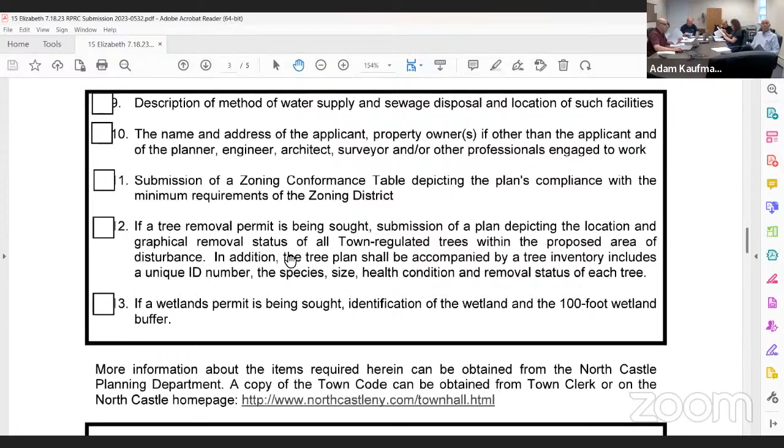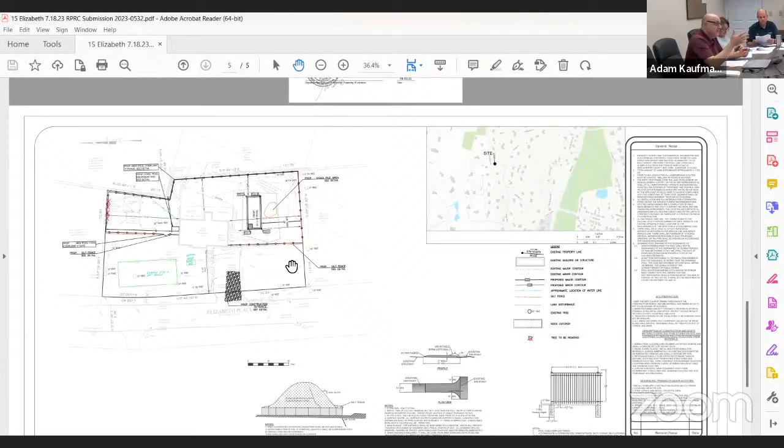Relatively simple project here. The only thing I have for you, John, this is a pool on the side of the house. Going out there, it looked like there was a lot of fill potentially that was brought onto the site. Did you see that? No. Okay, so maybe check that out, just see what's going on.

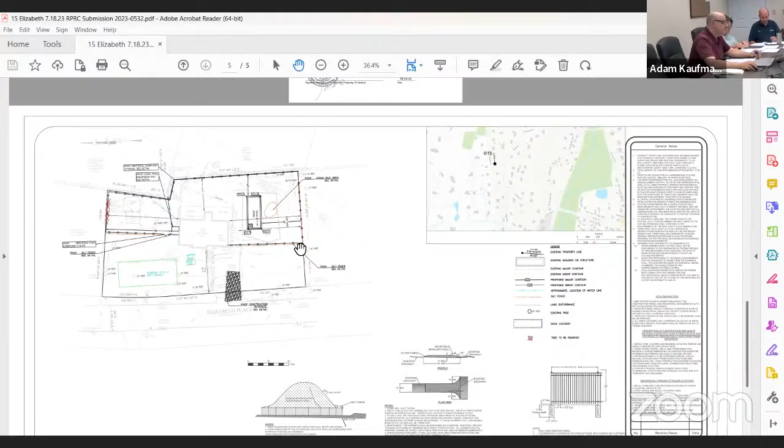I had a note that they should include a zoning conformance table for the 30-foot rear setback. They have to move the pool equipment so it meets it. And for the four trees along the northern property line, I suggest they replant those trees. They don't show a pool patio, so I guess we should just clarify that it's not being proposed. Other than that, no major concerns.

Anything on your end? You said zoning compliance table, stormwater - that's pretty straightforward. So that was where the stockpile was, all here. Take a look. I couldn't tell.

So with that all being said, any concerns about moving this to the building department? No, just with the stockpile - the contour of the property, when you look at that, would one want to bring fill to kind of level it out? Maybe that's what was happening. I just don't know. I want John to just take a look. Why would you bring fill in to excavate it for a pool? I don't know the contour. I don't really know what's going on, so I'd let John just take a peek at what's going on.

So I'll make that motion to send it to building, with John taking a look at those issues. I'll second. Okay, all in favor? Aye. Thank you.

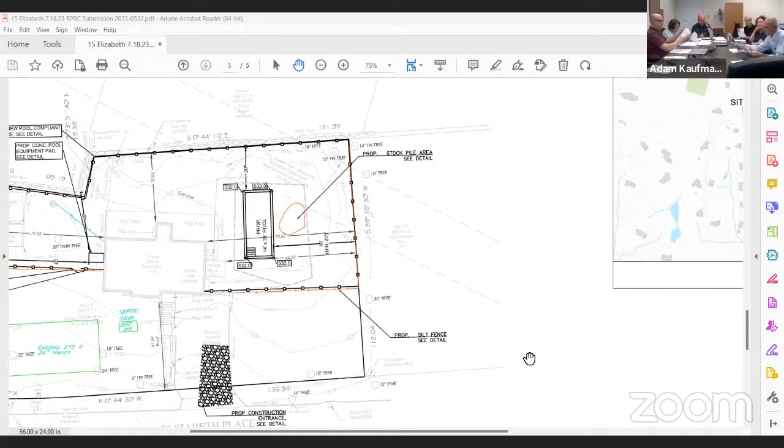Someone else join. It's like the last person would probably be the next application. Or 40 Sarles? Oh, no, 15 Elizabeth Place. See the last person in the waiting room? Oh, okay, Paolo, I missed it. Yeah, let me just tell Paolo. Okay, thank you for telling me.

Paolo, you with us? You don't have your microphone on, but we didn't see you waiting here before we started discussing your application. Everything looks okay, and you were sent to the building department. We're going to have a letter of determination with your next steps posted to the RPRC's webpage later this afternoon. If you have any questions, you can reach out to me, but all looks to be in order. We'll post everything and you'll see your next steps, okay?

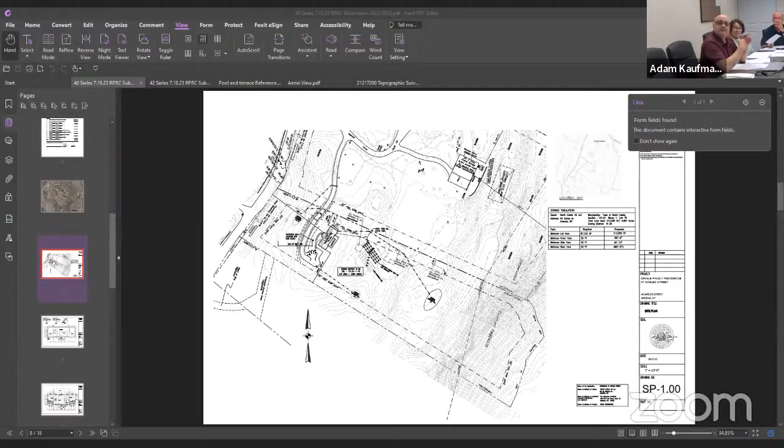We previously looked at a single family house at this site, a larger house. The applicant now wants to significantly reduce the scope and size of that house, so essentially that's what we're left with. Is that a good summary? That is correct, yes. The new cottage is about 1,700 square feet.

It's the main house here at 40 Sarles Street. We have access from the main residence. As you can see here, there's an easement that we have created. And this is the overall site plan. We have a drainage and septic system that's all working properly.

And we have Adam Pilch assisting us with the project, who's joining us now. Yes, I'm here, took me a moment. On the septic system, we've actually done deep hole tests there, witnessed by the health department as well. Wayne Schneider was out there and we witnessed it. We still have to do the percolation testing, but the soils look really good.

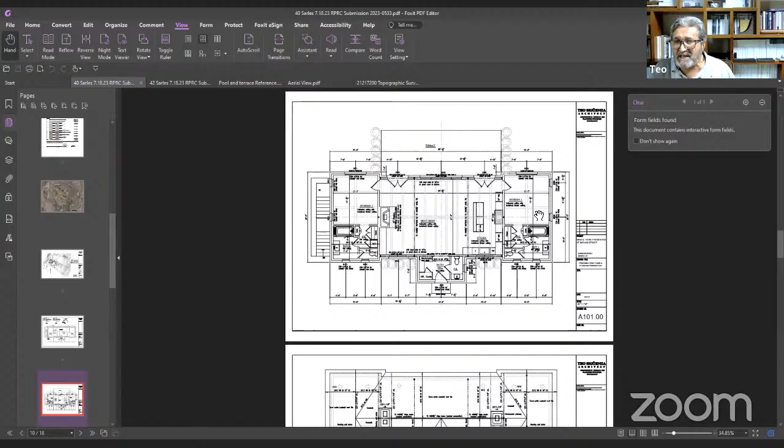Okay, show us the elevations. Briefly, on the floor plan, we have a large open room with a cathedral ceiling, and then two bedrooms at each end - a bedroom suite on each side, with a little entry hall. The elevation is quite simple, very cottagey-like stone with a tile roof.

That is the front elevation, the approach, and in the back it opens a little more because of the view. So we have a set of windows and doors to the rear, and the two bedrooms flanking this larger space. Great, is it stone?

Or shingle? The whole structure will be stone. Would you have some of the stone that we can look at? Yes, as a matter of fact, that stone is being used in the main house of the residence at 42 Sarles Street. And yes, we do have that stone - we can show you pictures, send it to you, or get you samples.

And what color is the roof and the trim? The trim has a gray tonality, and the roof is actually a deep brown. I do have a reference of the roof, which is a Ludowici tile, that I can show you in an image if you give me one second here.

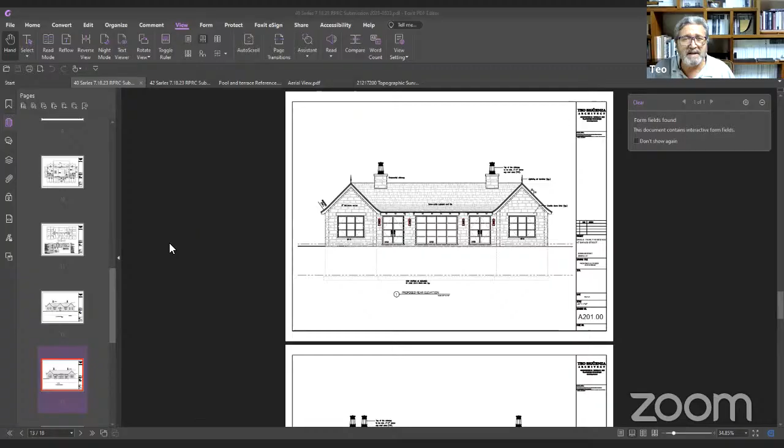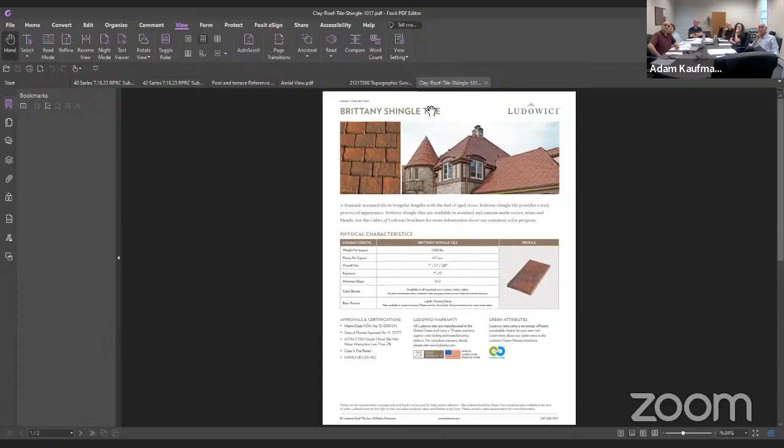And is there a landscape? This is the type of roof here - I don't know if you can see my screen yet. Can you see my screen here? Yes, yes, we see it. Yeah, it's a Ludowici tile, so that is about the color we're using.

Sue asked, does it match the main house roof? That is correct, yes. And the stone again, it's a warm stone with a gray trim, unlike this one that shows in this image as brown - it's a gray and it looks really nice. We will keep the feel of the main house.

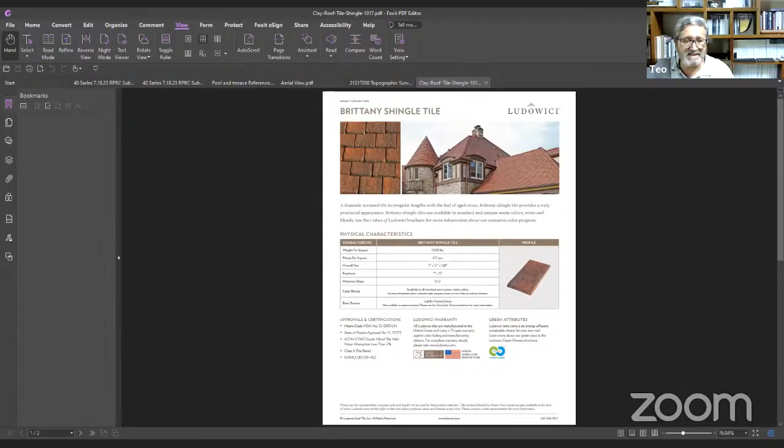By any chance, do you have easy access to the previous elevations from the previous approval? Yes, I can do that. Show Sue what the old one looked like, right? Or do you not care? She doesn't care. Forget it - but it's just a much smaller house.

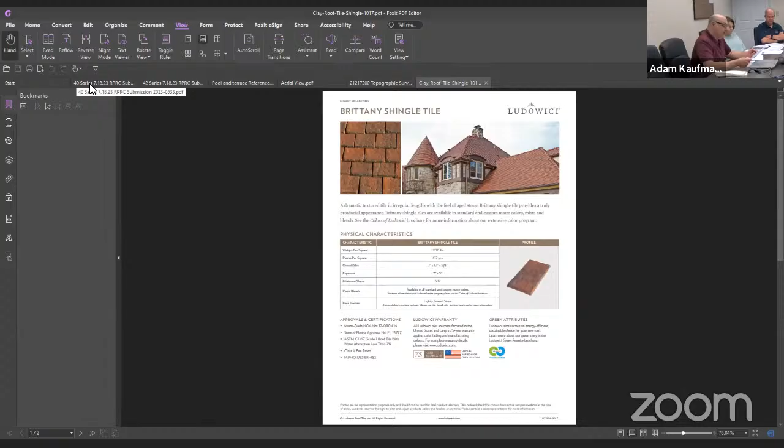Let's see, so this is my comments: smaller house, tree removal if you're proposing any should be shown on the site plan, Teo or Alan. Site grading, landscaping plan, County Health Department. You're going to show building height and maximum exterior wall height.

It will be fine, but you should note it. We talked about the access agreement, John and I, on our memos. Anything else besides stormwater you want to discuss?

No, grading, driveway profile. So it all looks good, a little bit more detail we need to see, but the concept seems fine. The architecture is beautiful, it's a beautiful piece of property. It's not going to be visible by anyone else. No, it's fine. So I'll make a motion to send this to the building department. Obviously, no wetlands here.

Anyone want to second that? Larry, all in favor? Aye. Aye. Okay.

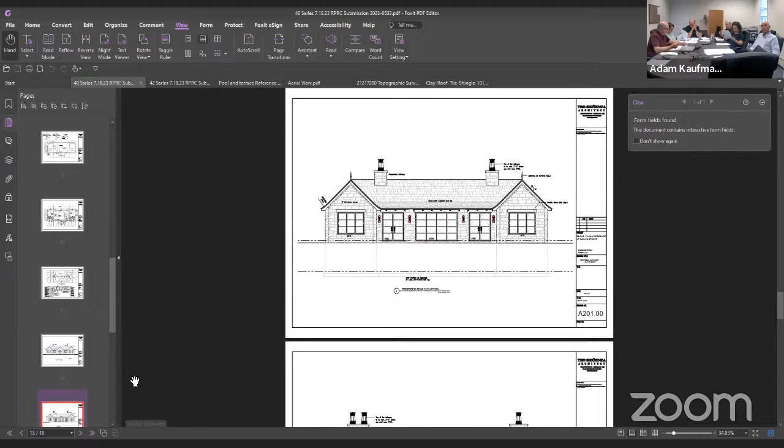All right, one down, now 42. If you could pull that up too, Teo. We previously approved a pool and pool house very far away from the main house. In fact, it's closer to this new location, right there where Teo is. So that was where the pool and pool house is. I always thought it was a little bit odd that complex was so far removed from the main house. So I guess they felt the same way and they're coming back to revise the plan to show a pool house now much closer in the rear yard of the main house.

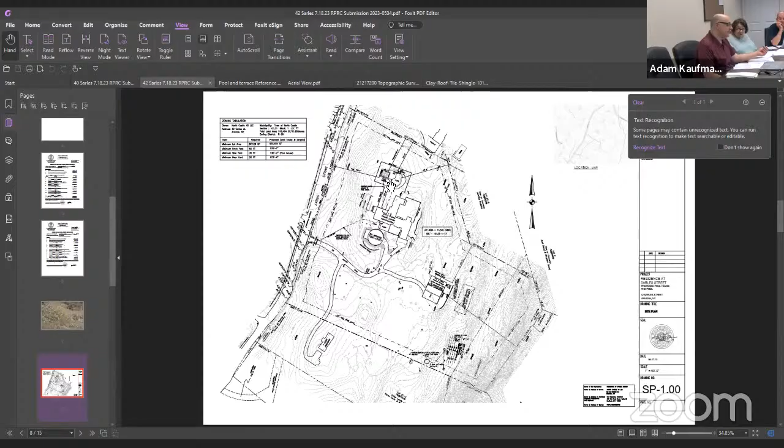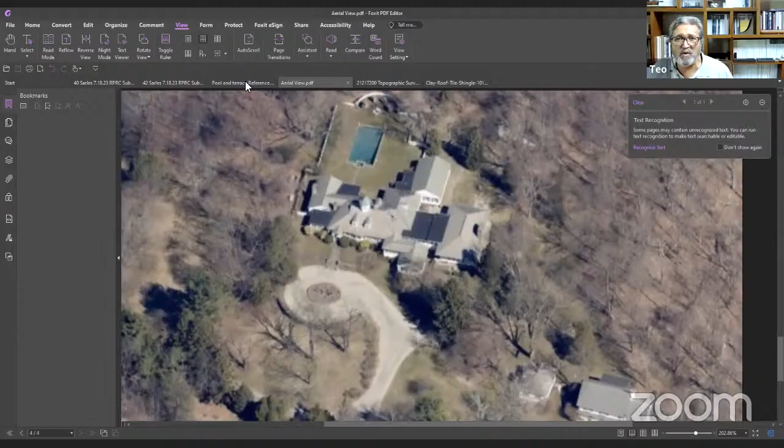Makes total sense. Yeah, and actually, this is the way the original house had the pool situated, as you can see here. Initially, the original house, from many years back, the pool had an approximate location. We're just changing the type of pool to a little more free form, like you can see here, with a little waterfall and amenities of that nature.

And it's much smaller than the approval we got before, because now the structure really just has a little open space, as you can see here, for a kitchenette, like a little serving bar. And there's no cooking facilities, no sleeping accommodations of any sort. A changing room in here, a bathroom, storage, and just an open lounging space.

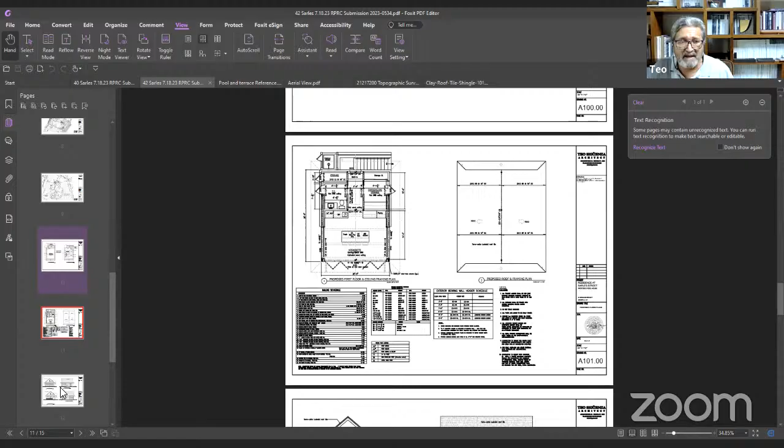Yep, it looks beautiful. You can see here, very simple. Yep, and that matches the main house and the other building as well in terms of stone and roof. Totally, we'll have the same roof, we already have it on site, and the same stone, the same trim. Yeah.

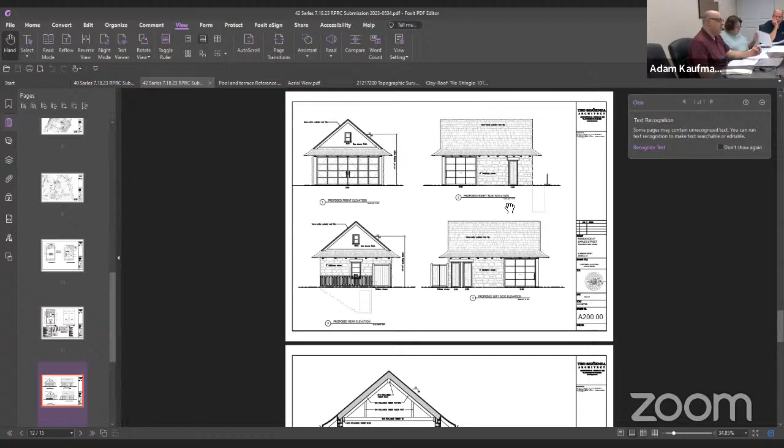If you could go back to the site plan, and this is really for Cromwell, you could see the pool house, Mike, is located in the front yard. A piece of it extends beyond the plane of the main house. So it has to be 3 times the setback, which it is. And it has to be on a property that's 3 times the minimum zoning lot size, which it is. So it's permitted the way it is depicted.

Tree removal, Teo, I didn't know where the tree line exists. Yeah, there's a tree removal permit that we got from the planning board, and there are a couple of 2-3 trees in this vicinity, which is part of that approval. Okay, so there's no more new trees that need to be removed, no amendment to the tree removal permit. That is correct, there's no new trees, they have all been approved by the planning board.

Yeah, all right. So then I'll make a motion to send this, anything engineering wise? Typical drainage. Okay, so then I'll make a motion to send this to the building department. I'll second. All in favor? Aye. Okay, all right, guys, you're set.

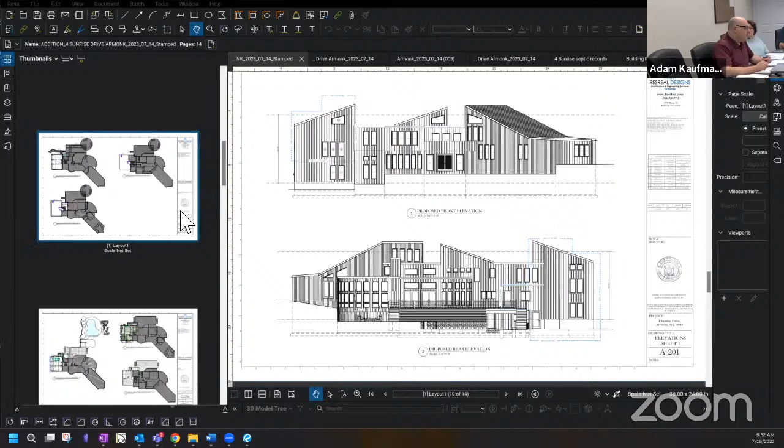On first. All right, so we took a look at this. The applicant is proposing, this is the garage extension, right? Correct. Do you want me to walk through the scope or do you want to? Walk through the scope. Sure. Yep, that's helpful, thanks. Okay, perfect.

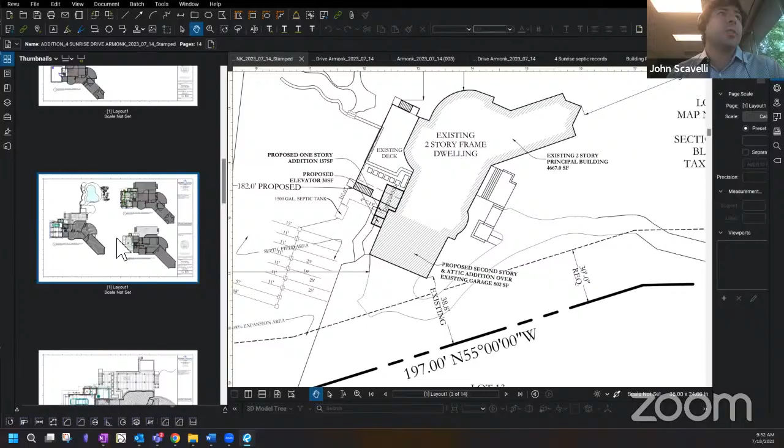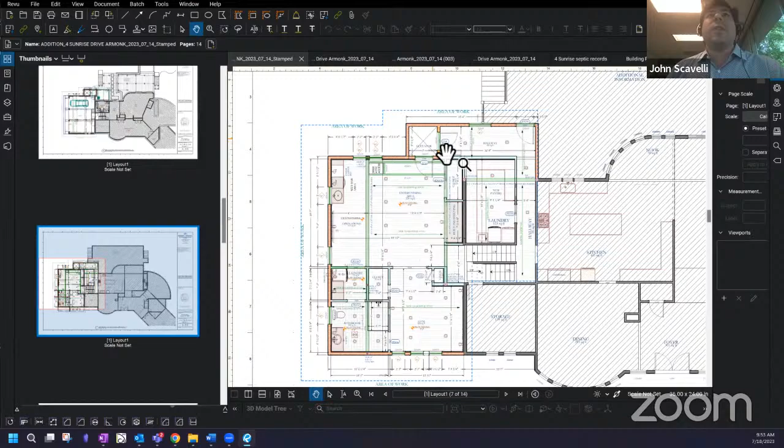So I'll just start with the site plan. Essentially at this location there's an existing 3-car garage. The owners are looking to add an addition that has ADA accessibility for a family member that will need wheelchair access. So the goal of the project was to create an elevator connection off of the ground level, so that there'd be access through the garage to an elevator that would go up to an ADA accessible family room. Then there'd be an elevator and hallway connection, and that would take us to a new addition over the garage that would be an ADA accessible space.

On the prior version, Adam, I had sent an updated layout based on some of those preliminary comments regarding reducing the size. There's a larger wet bar area, but basically we're proposing to reduce the size of that, and then providing an ADA accessible bathroom space, and a gym space, and this would all be open, connected into the existing house as is.

I'm just going to go to the elevation views to explain the location of it. So this is the proposed front elevation. At this bottom left-hand area, this is the existing garage, so it's the space above that they're looking to add that addition. Over here, it's this section right here that they're looking to add over the existing garage space.

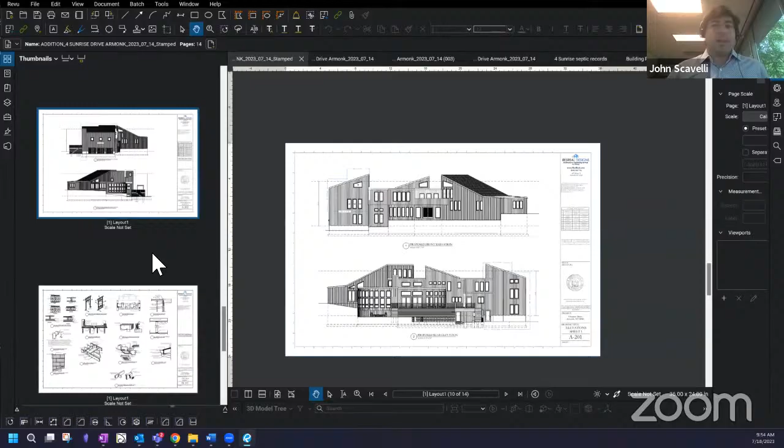That's very well explained. Oh, okay, all right, good. Yeah, so that's a good explanation of everything. Our original comment when we reviewed this is, John, it looked like it was an apartment, which is okay, it's just a different approval process.

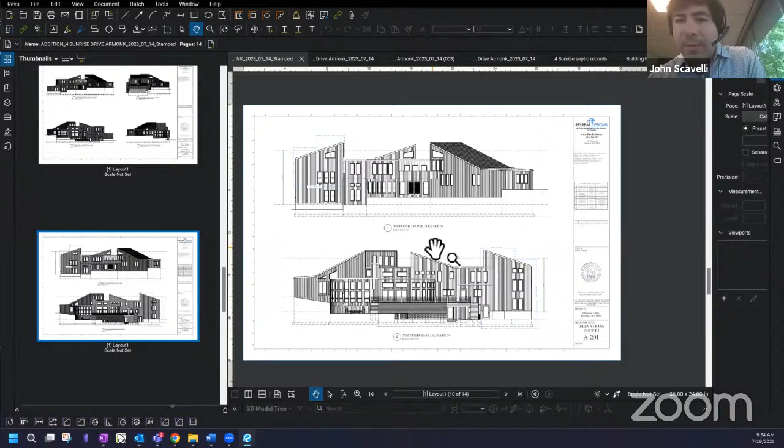So I guess you've talked to the building inspector, is that what happened? Yeah, so the contractor on the project had met with the building inspector to review that. The owners aren't looking to have any sort of private accessory apartment type space. So the one comment that the contractor got back from the building inspector was basically just reducing the size of the wet bar area, and that's what this latest update we emailed over yesterday addressed.

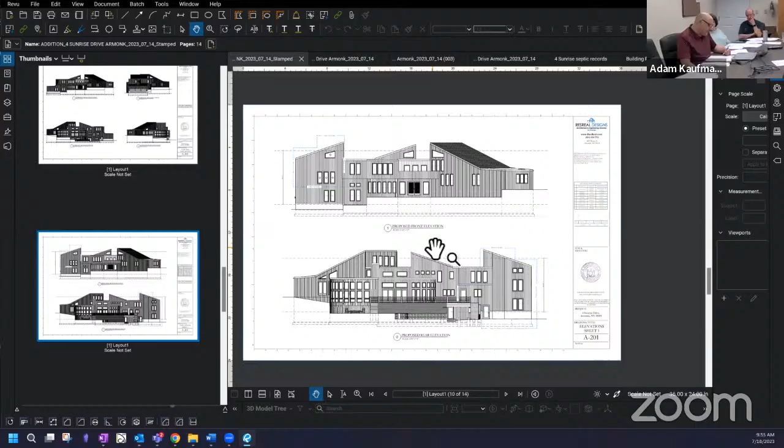Okay, and then I saw you said that the originally submitted floor area calcs were not right, included some basement space that shouldn't have been counted. Yes, if I could explain that, I'm going to go over to the floor area calc sheet. So it's down here.

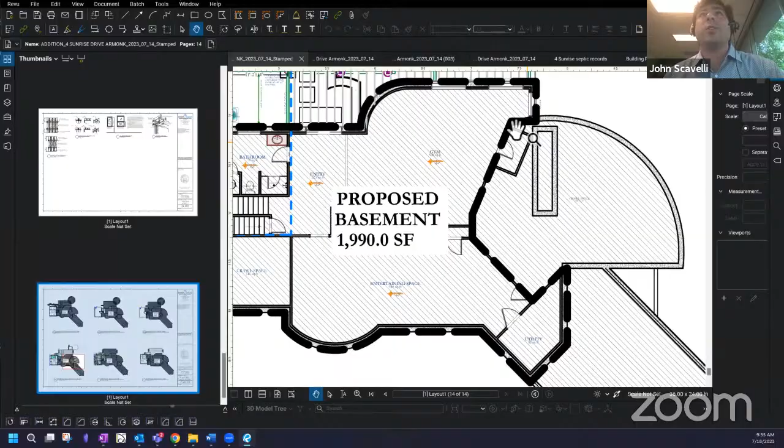On the original submission, there's this large area over here, which is actually a crawl space. It's a very shallow height crawl space with mechanical equipment, so it's not finished, it's not livable. That was actually counted on the original submission, which added a significant amount of square footage. So the revised items sent yesterday clarify that, but there was a lot of square footage in this space that is not livable floor area.

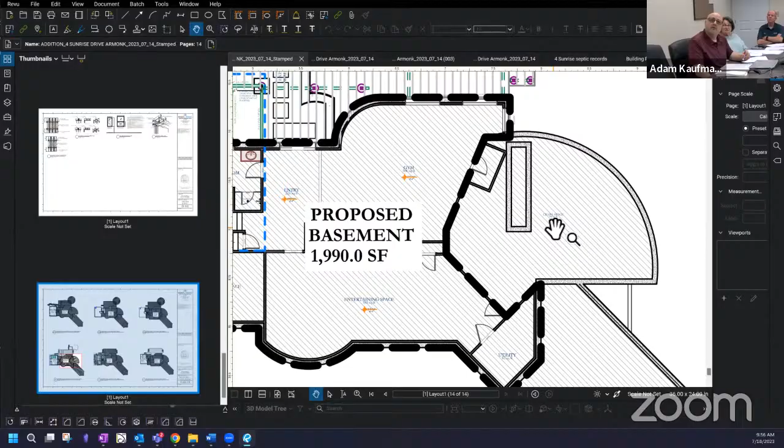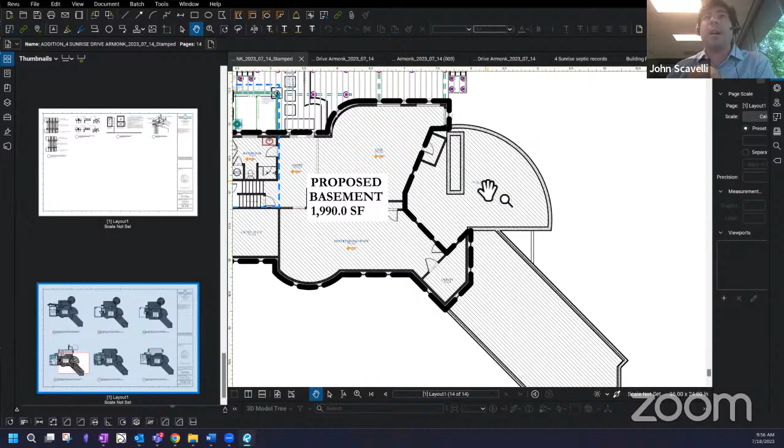So this basement though counts because it's, what, exposed? Is that it? This basement is a walkout in the back here. So yeah, based on the floor area definition, this is a fully exposed wall in the back. This is already part of the existing house, but this is a finished walkout. This right corner of the house is all below grade, and this is actually just a shallow crawl space area.

Okay, and then the land coverage. So I quickly looked at your response, which was that the tennis court is the reason why you're above the maximum, and that's it, all that is legal. Yes, no question. The issue is you're proposing new land coverage, right?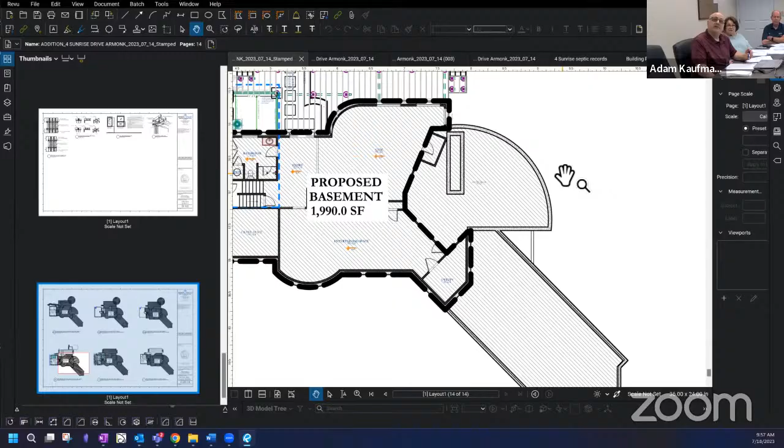So let me actually go to the site plan. It's small, but the back elevator shaft is extended new. One question, is it possible if they were to reduce some of their walkways to get basically the land coverage to remain the same as it was with the approval on the tennis court? Would that be a way for that coverage to get approved, basically staying as is?

We could talk to the building inspector about that. I think in the past they said no, that you'd have to bring it all the way back to conformance. So worst case scenario, you go to the zoning board. I think you have a very good argument here, you need access, you're providing it for a family member, so you'll get the variance, but that might be the route you have to go. Okay.

Let's see what else I have. Health department, by the way. You don't see this house from any place - maybe from the garage side. There's a house over there, but you can't see this house from any place because of the foliage. Maybe I thought I saw the neighboring house, but it's okay.

It still looks nice, John did a good job here. Anything engineering wise you need to do? Just a health department determination on that new space.

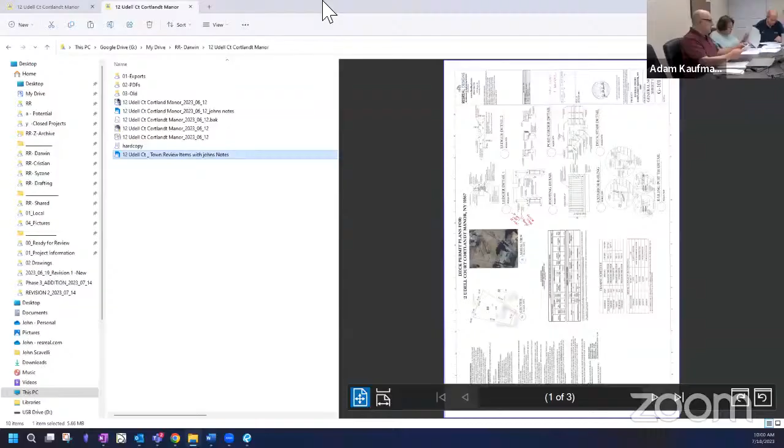All right, thanks John. Now we're gonna go out of order because John has another application on the agenda today, which is 15 Wampus Lakes Drive, so let's move to that, if everyone's okay with that. This application we saw on our last agenda, I think. So John, if you could bring that one up.

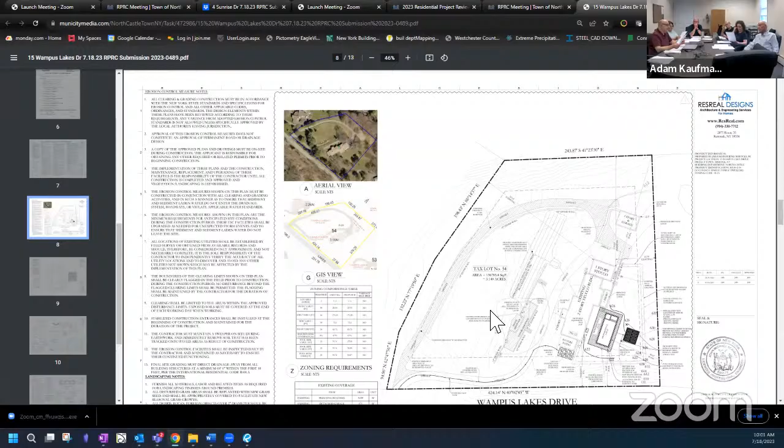All right, the screen's just loading up. This was a property that had a lot of driveway, and as a way to deal with the code, a good chunk of that loop was being removed, the shaded driveway areas. So I had a couple questions about access to the existing garage, and I'm taking it from your response, John, that they don't use it as a garage, it's more of a shed.

Is that what's happening? Correct. Is my screen showing? Yes. Okay, so this standalone accessory garage, they don't need as a garage for automobiles. There's actually an attached garage that would need car access, so this separate one would not need car access.

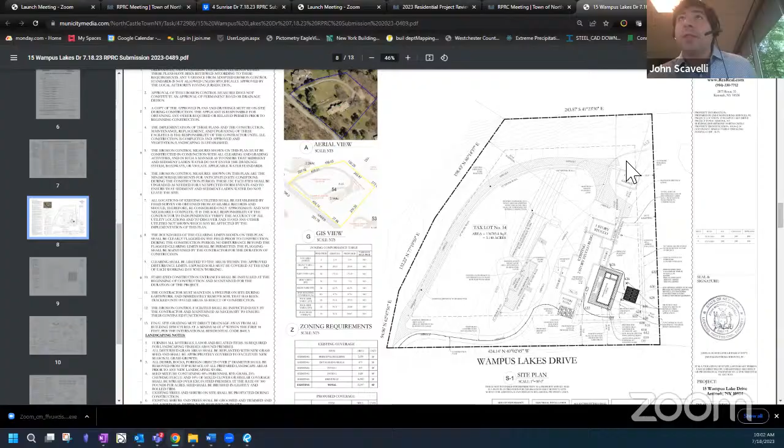Got it. And then you and I just didn't understand what I was saying. On the side of the garage furthest from the house, the back of the garage, there's a big gravel area behind there too that you probably didn't identify, but it exists. Okay, yeah, it wasn't documented on the survey, but that area would get all returned to grade grass area. You're talking about roughly in this area here? Yeah, exactly.

All right, then I guess there's just some cross communication - one part of the plan showed there was no tree removal, but then you also showed 2 trees coming out, so I'm assuming the trees do come out, and that looks fine.

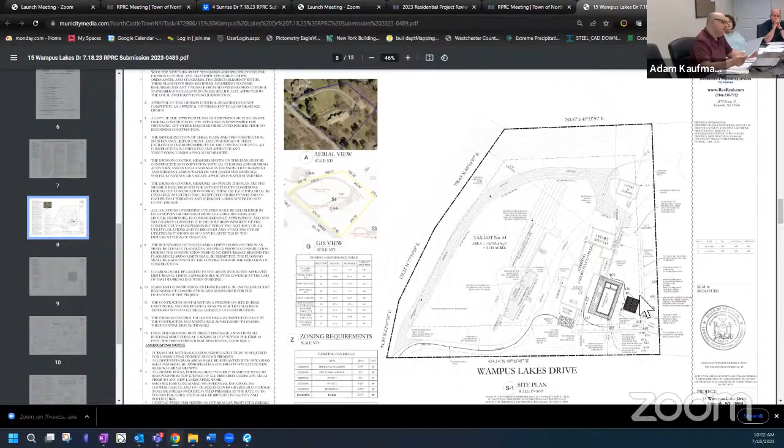And then the pool enclosure, are you proposing it around the pool? Is that what you were saying in your response? Okay, so for the pool fence - oh yep, the pool fence is proposed to run off the corner of the house here and encapsulate the backyard area, so that's fine. You'll just include a detail of the fence. That's fine, yep, okay.

Engineering issues - they addressed most of them already. I think they just have to do some soil testing.

John, the last point is the homeowner called me last week and said he might want to keep the driveway, and that's okay if he wants to go to the zoning board of appeals for the coverage. Did you follow up with him to see what he wants to do? Yeah, I did speak with him, and we haven't gotten a final determination yet, but it's kind of two parts. He wants to have a plan in place if he cannot get the coverage approved for the existing driveway, and then decide if he wants to actually apply to keep it.

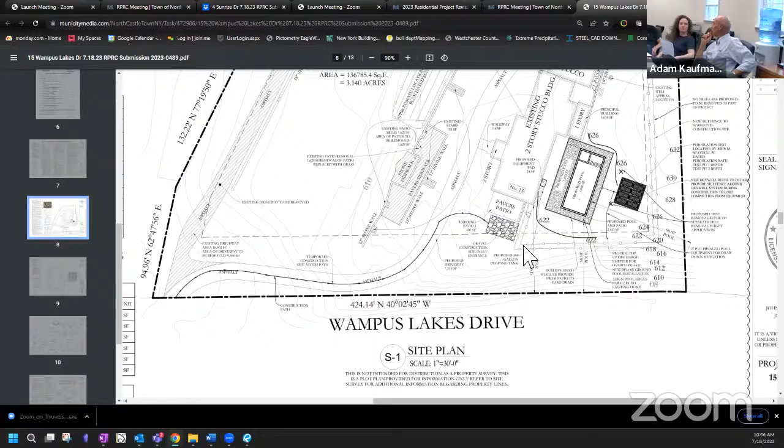That driveway was there back in 1980, I remember. You're the engineer on that project, right? Yeah, but I also worked for Carmine - I lived in that house, and I worked on the property years ago. It's up high, no? Yes, it overlooks Locust Pond - beautiful spot. Lawrence's father and mother's original house - the whole family grew up there. How much property was that?

133 acres. So, all right, to wrap up - I'm going to make a motion that we approve the plan keeping the driveway if the applicant is able to secure the gross land coverage variance from the ZBA, and we'll also approve the plan as depicted here with the driveway being removed, should the applicant not get the ZBA variance or wish to proceed with this application regardless.

Anyone want to second that? Larry, all in favor? Aye. All right, John, so now the homeowner can go either way.

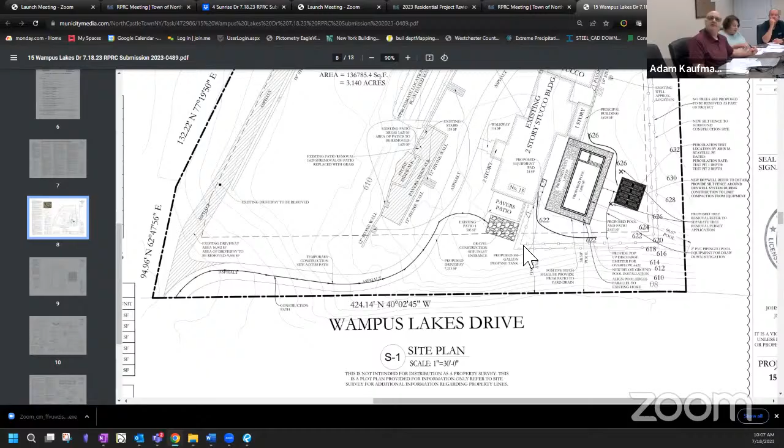Okay, thank you, I really appreciate that. I'll touch base with him and get their feedback as to the direction they want to go. Okay, sounds good. Take care. Thanks for accommodating the two applications together. Sure, okay, take care.

All right, so now let's go back in order. So that puts us at Carolyn Place. Do we have anyone here?

We do not, so I'll pull up these plans. Ooh, a wetland - there we go. Finally have something to do. Let's pull it up and share it. Is anyone watching this?

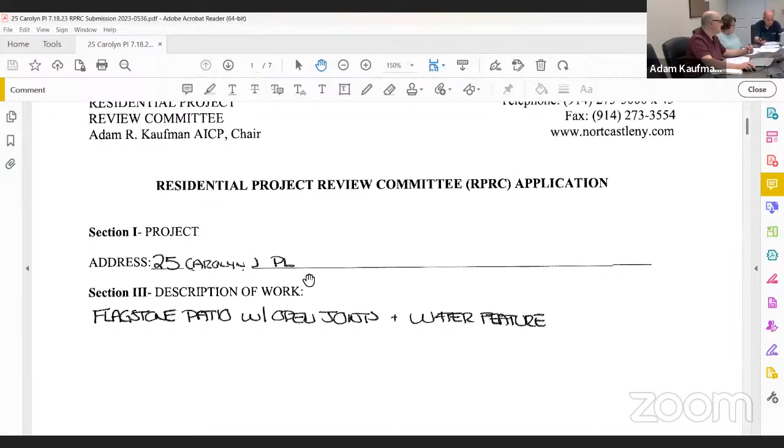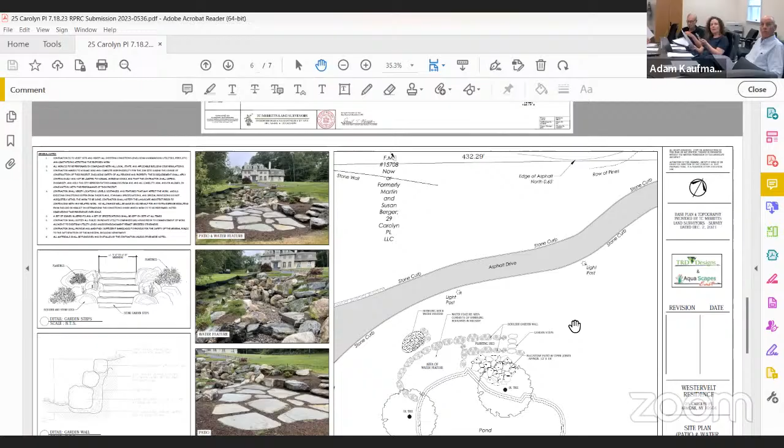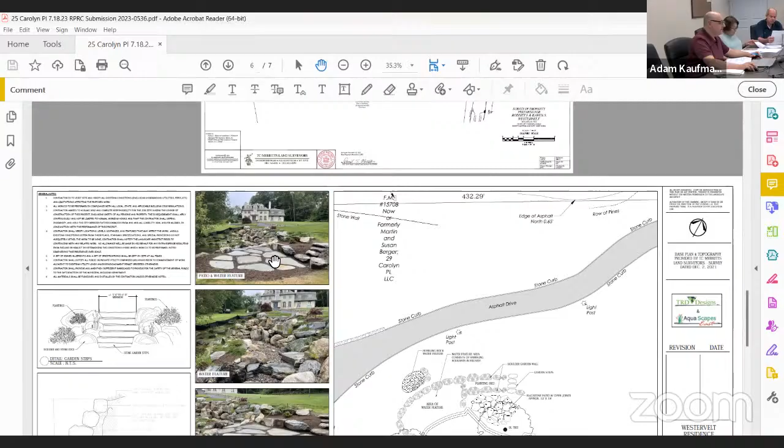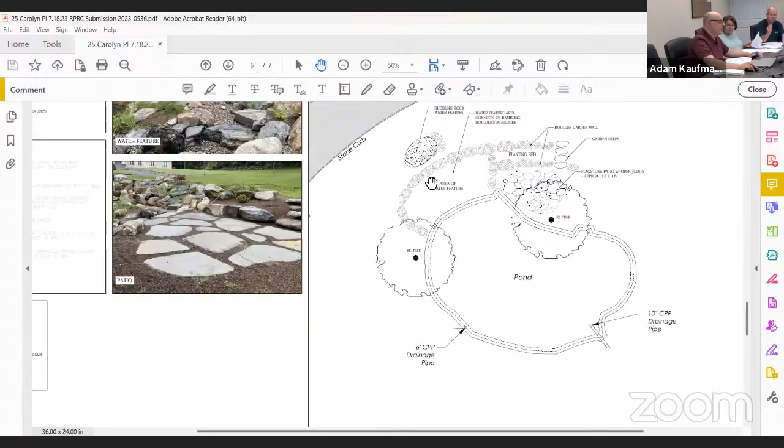Since the pond exists, and all these improvements are within 100 feet of that pond, it needs a wetlands permit. How significant this is, is debatable - we can discuss that with John's input here.

So it definitely does need the wetlands permit. They'll have to mitigate it. My comment is showing utility connections, there's power going there. I don't know how that happened.

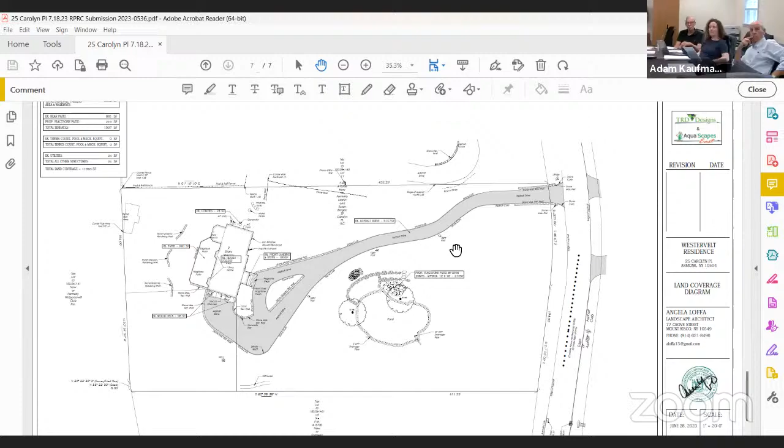And I want to make sure that septic is nowhere near here. I didn't know what that was. So there was a pond there, and they put all of that in. They built this patio, and now they're seeking a permit retroactively?

They must have put in all those rocks and fill above it. They created this whole feature. Probably need a fill permit also. And also an understanding of how much impervious surface was created.

I'm sorry if I'm saying things you've already identified. No, that's exactly what we're saying. So the annoying part here is the building department has to take a look up there. Probably a year ago, the owner wanted to just repair the existing wall around the edge of the pond.

I said, okay, if you keep no disturbance of soil, just fix the wall, repair it, and then you get a repair permit. So that wasn't there when you saw it a year ago? No. And now they want repairs to sell. We've seen this before.

Sure, alright. So the question is, did they ask first about a minor repair? We were good to them, we didn't have to go through a whole process for repairs. And then this happened. So how do we want this, where should the review occur?

Is this something the conservation board handles? Yes, I agree. There will be a site visit. And who's gonna check out the fill, is it engineering? It's gonna have to do a fill permit. Is it a lot of fill, you think?

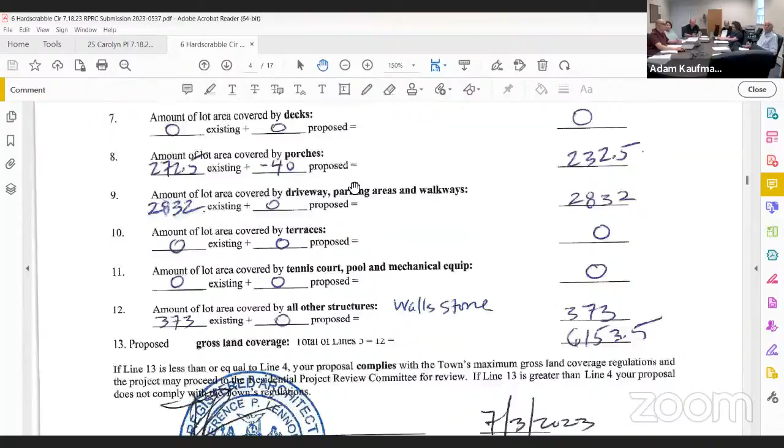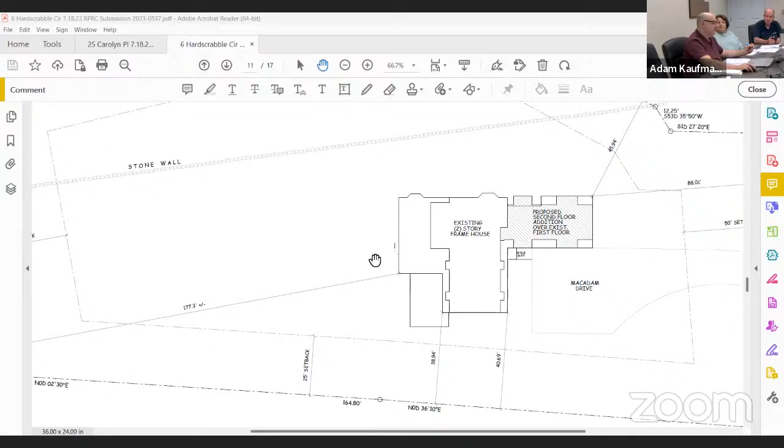Okay, so this is an existing house with a single story garage. They're proposing to put an addition on top, or above, I should say. It's like 20 by 10, not huge, so here's what it does to the elevation.

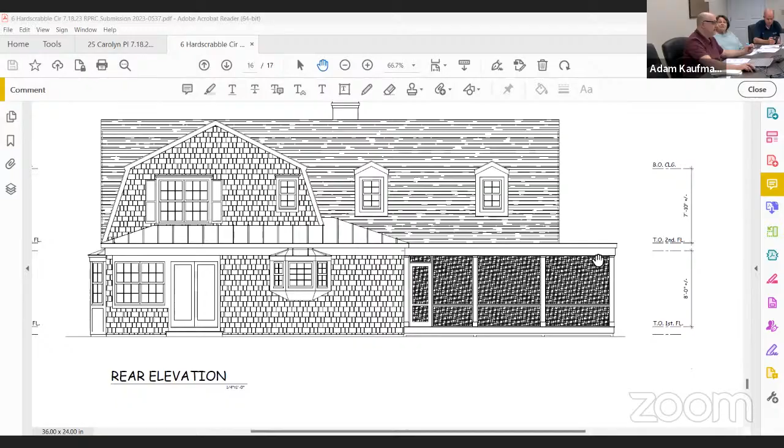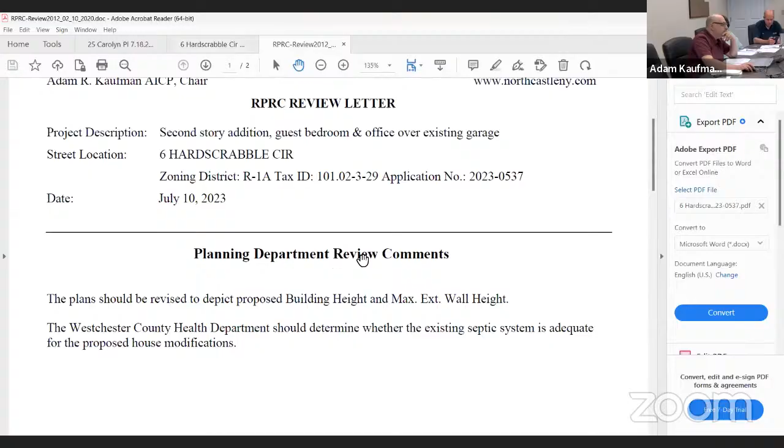That's the main house existing. So this was one story, and they're adding the dormers and the roof. Let me see if I've got a picture of the existing house. Yeah, so that's what it looks like now, and that's what it will look like. No problem, yeah, that was my thinking.

Any concerns engineering wise, or from our health department? No. Health department, yeah, looking at bedrooms, et cetera. So, I'll make a motion to send this to building. I'll second. All in favor? Aye. Okay.

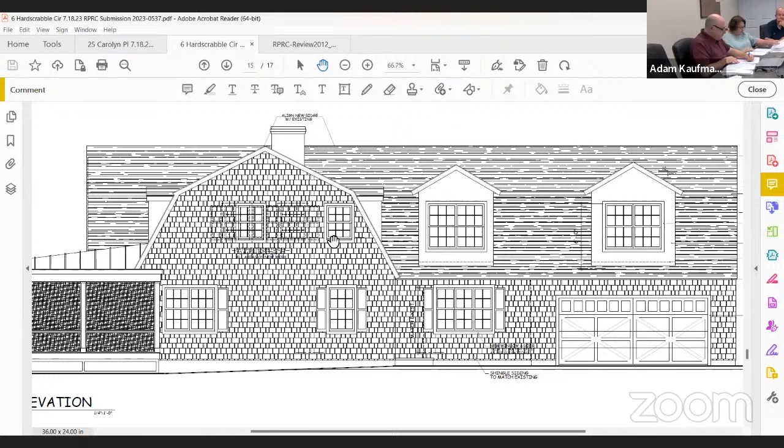Bring those neighbors in. Yes, now we're up. Mike, do you mind just telling Jocelyn to let everyone in? Okay. Yeah, minutes. I hope they bring... Josh, we're ready. Yeah.